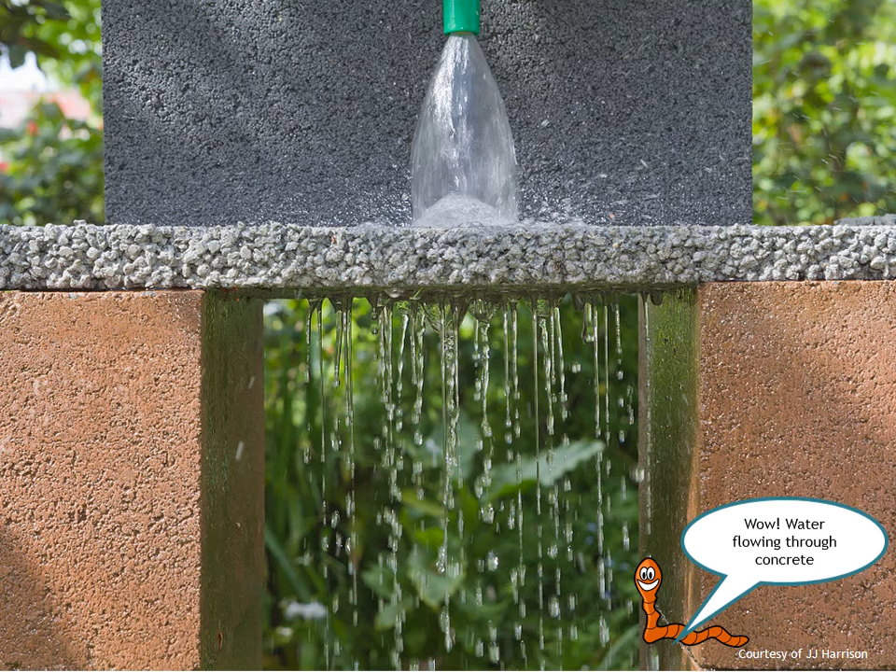When you are walking, bicycling, or driving, do you notice the surfaces you are traveling over? Hard materials like concrete, asphalt, or bricks are common. These are chosen for their strength and durability. But watch them in the rain. Water will puddle and pond because it cannot pass through and does not soak into the soil below. Permeable pavements, however, are different. These surfaces are engineered to let the water in.

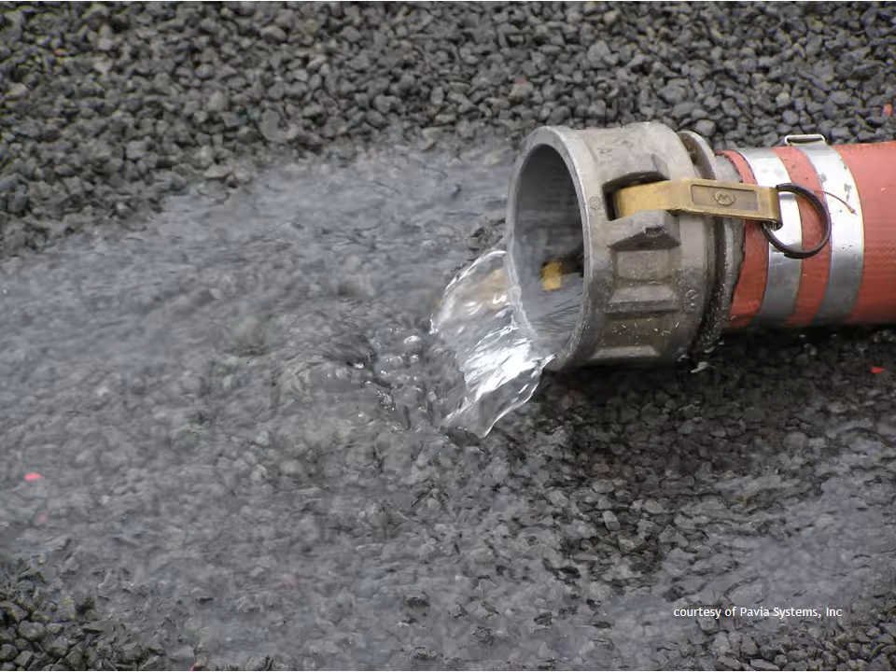Rainwater that puddles and ponds on our playgrounds, sidewalks, and roadways becomes stormwater, carrying dirt, oils, and all manner of pollution to the nearest water body through storm drains. If you are in the District of Columbia, the rain falling around you is headed to Rock Creek or the Anacostia or Potomac rivers. During heavy rainfall, streets may flood temporarily, but even those waters will eventually end up in the Chesapeake Bay. Permeable pavement can help protect the quality of our rivers and the bay.

By allowing large amounts of rainwater through paved surfaces, we help restore the natural water cycle and minimize the polluting effects of our city.

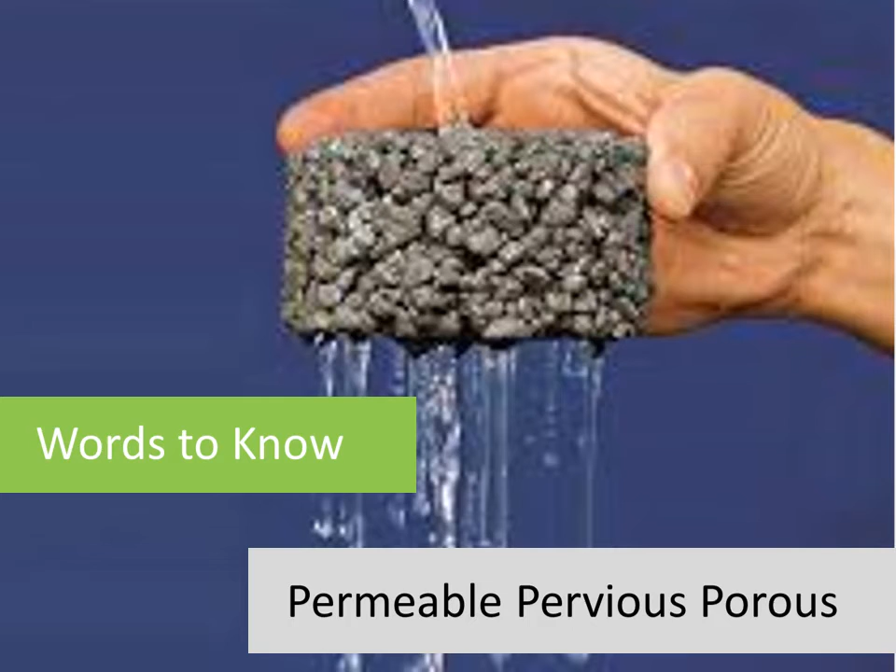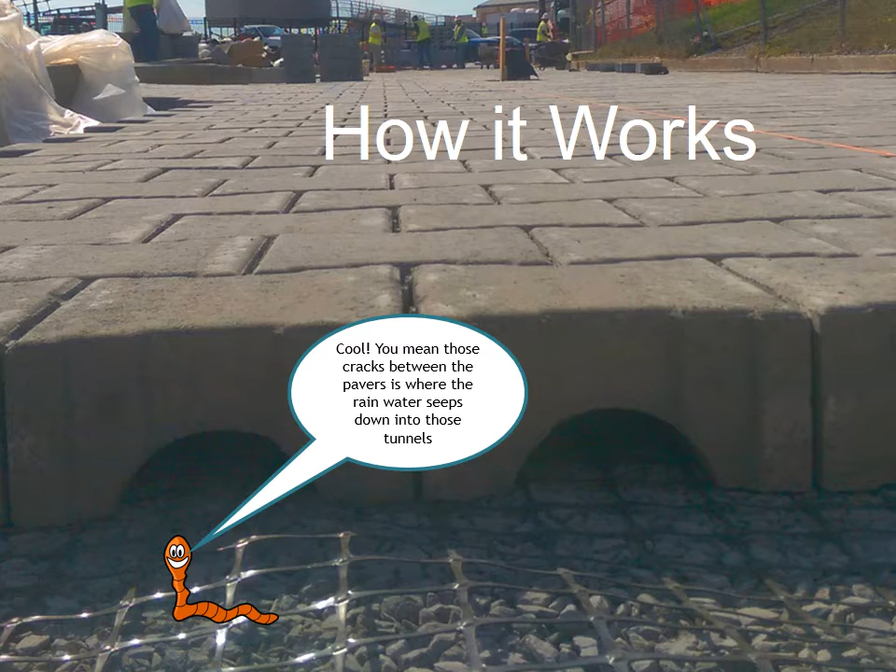Permeable pavement materials have unique and interesting properties, but their ability to absorb rain and remain strong relies on strategic layers of specially selected rocks or aggregates. These rock layers may be a few inches or several feet deep, and this depth will be decided based on an array of factors, from the amount of area draining to the pavement, the contour of land, and the type of allowable traffic.

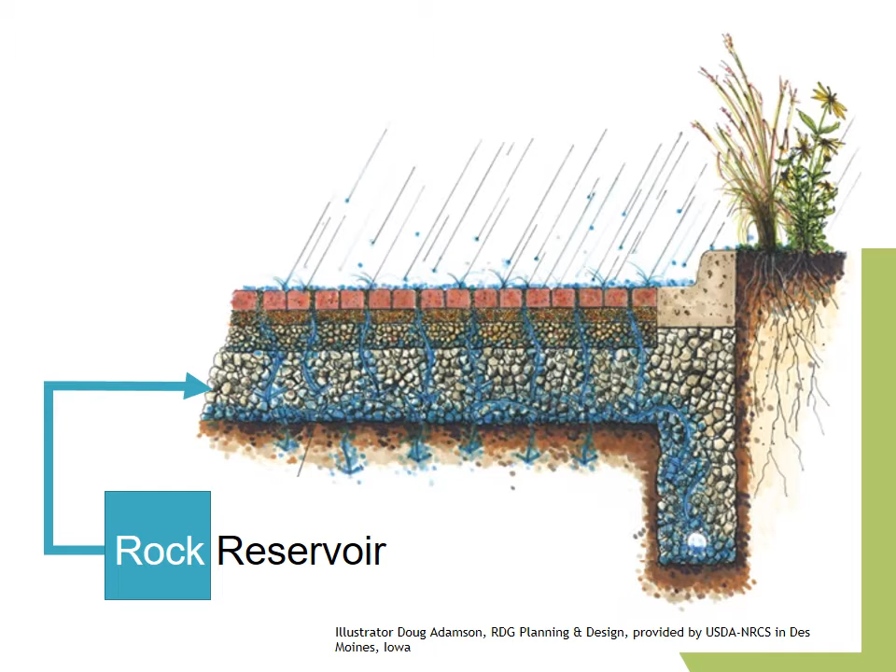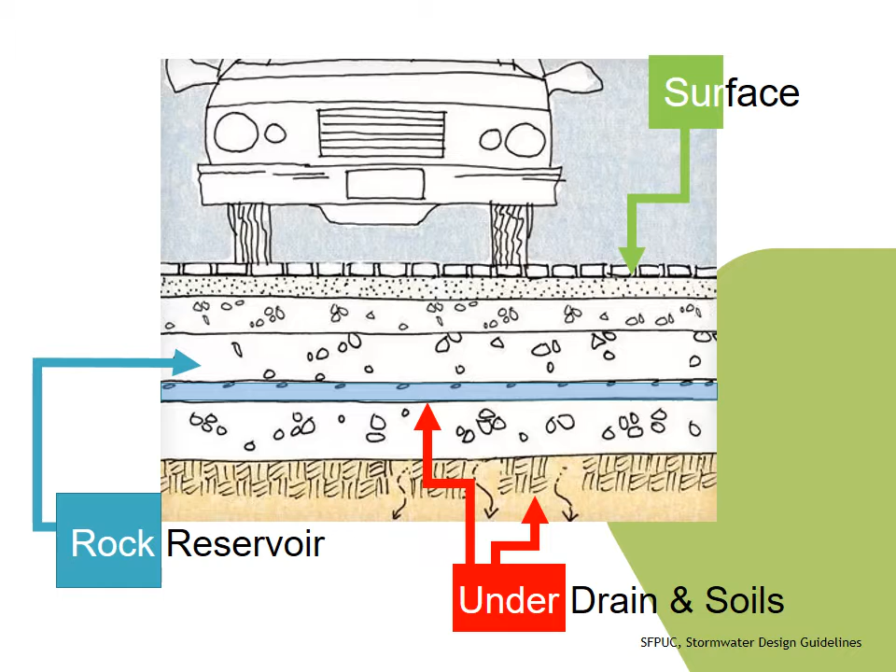Permeable pavements are systems with 3 main components: the surface to let the water through, the rock reservoir to store it, and a combination of underdrains and underlying soils to give the stored rainwater somewhere to go. In some parts of D.C., the soils below existing sidewalks and roads have the capacity to absorb rainwater. But in some parts of the city, the soils do not. If you are in an area of the city with clay soils, a permeable pavement system is certain to have an underdrain to slowly release the stored rainwater back to the storm drains long after the storm is over.

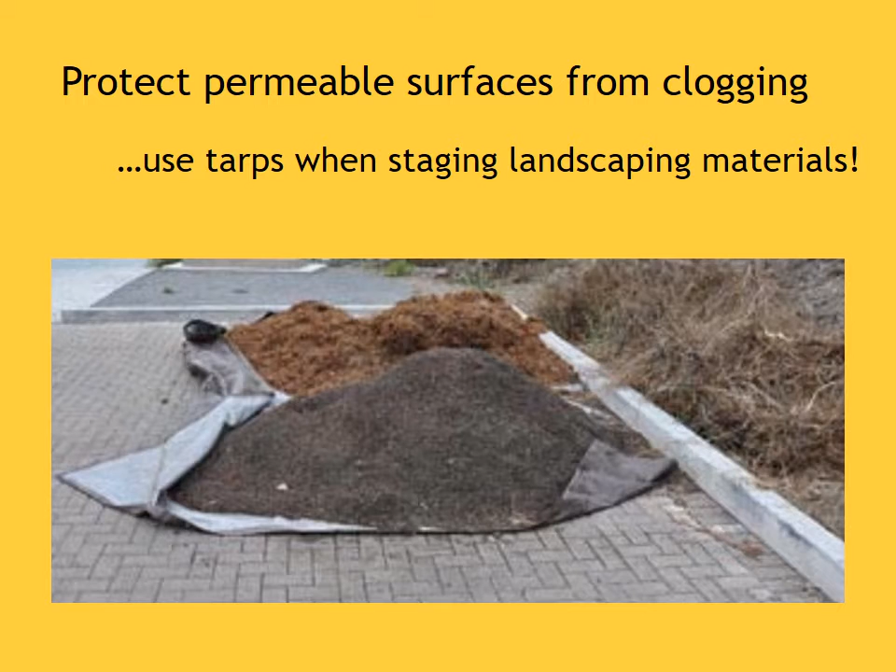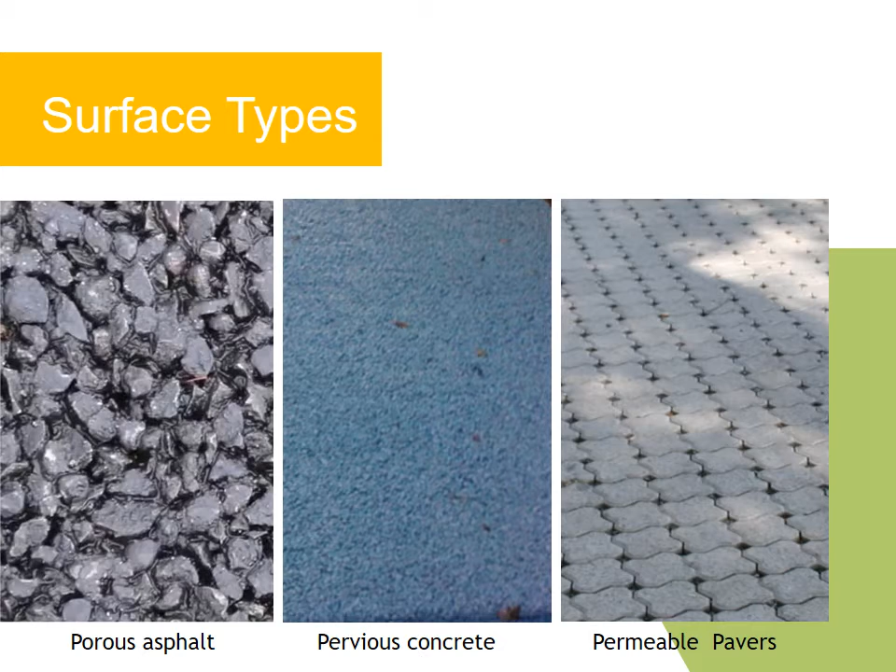Knowing the parts of a permeable pavement system and how they work will help you spot the maintenance challenges and remember the do's and don'ts when you are gardening nearby. There is an ever-growing market of innovative surface materials used for permeable pavement systems. The 3 most frequently used in green schoolyards are porous asphalt, pervious concrete, and a range of permeable pavers that can be pervious themselves or rely on the aggregate-filled joints between the pavers to create permeability.

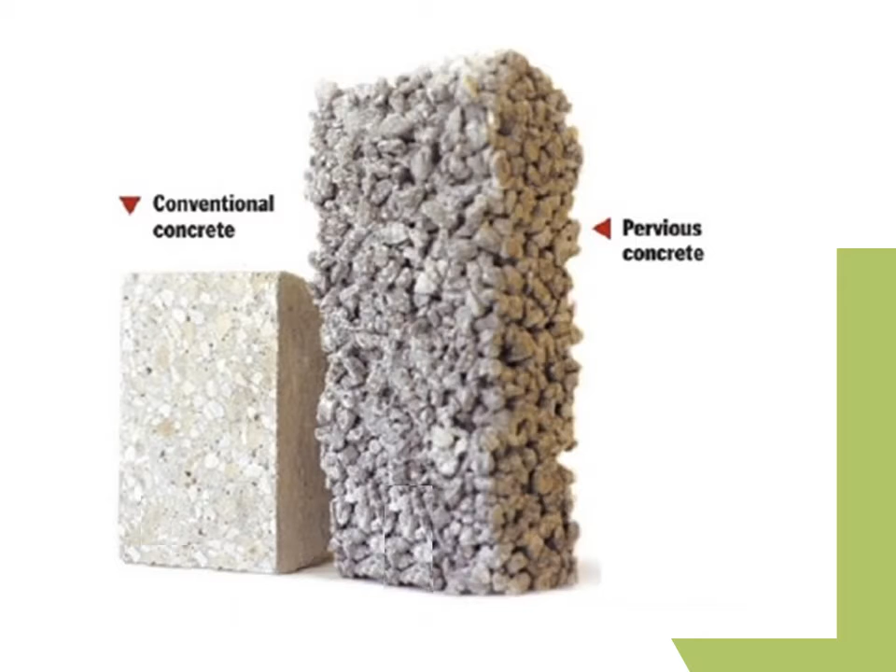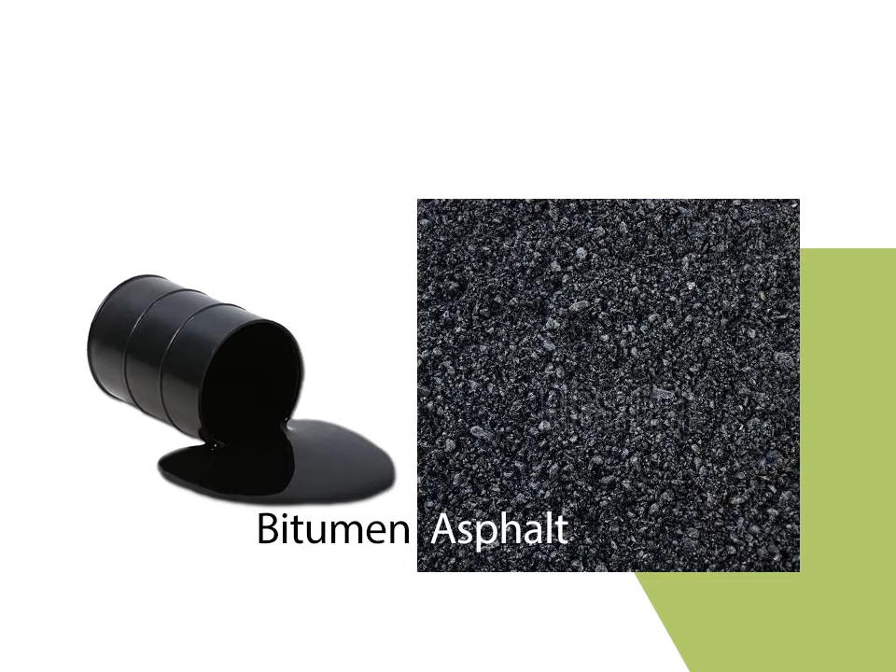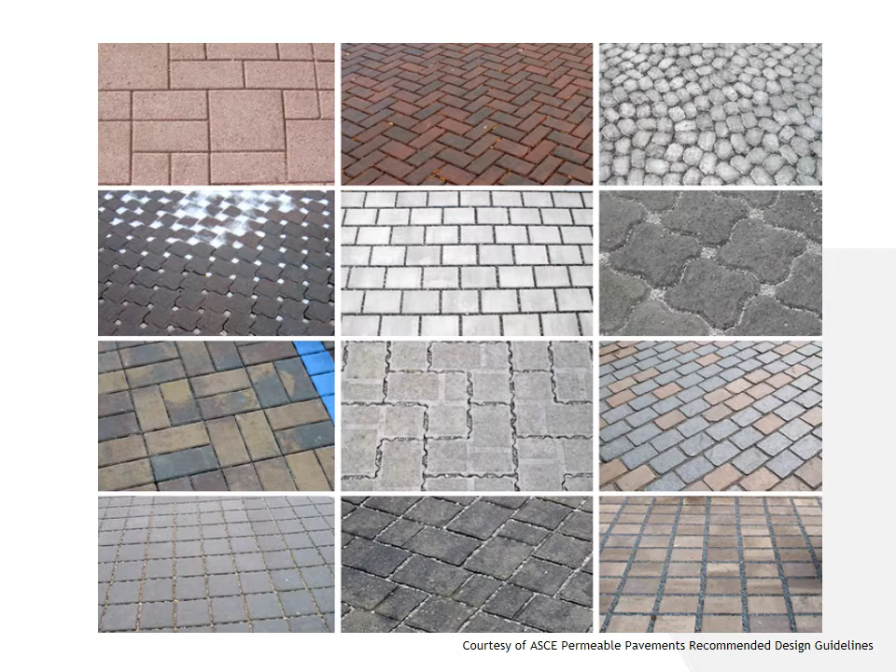Pervious concrete is made of the same ingredients found in conventional concrete. The difference is in the amount of the fine-grained sand left out, creating a popcorn-like matrix with space for the water. Similarly, porous asphalt is made of the same ingredients found in conventional asphalt. The difference is found in the type of binder used, also creating the popcorn matrix with void space for water. With interlocking concrete pavers, the paver itself is a traditional concrete and impervious. The system's permeability comes from the aggregate in the joints between the pavers.

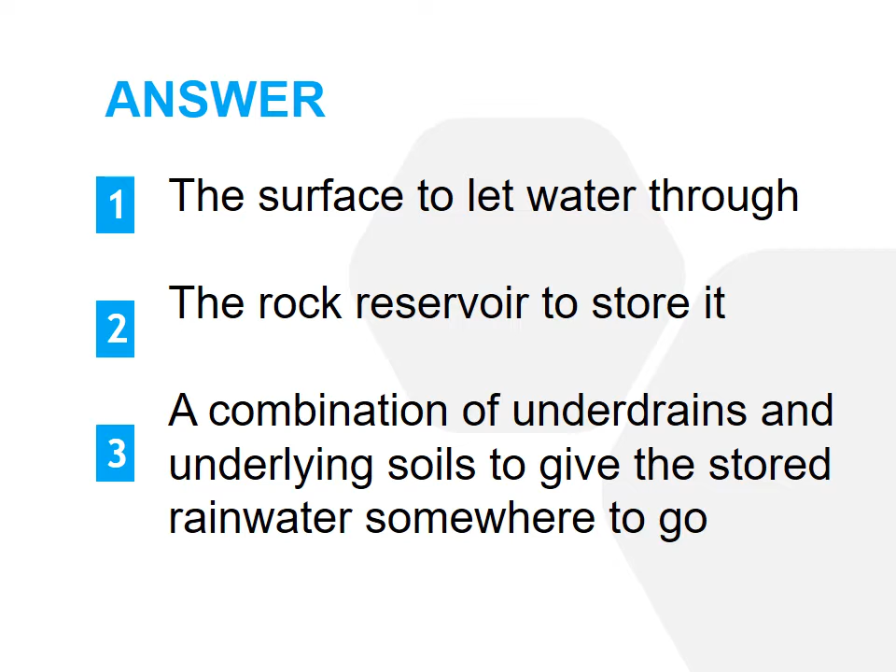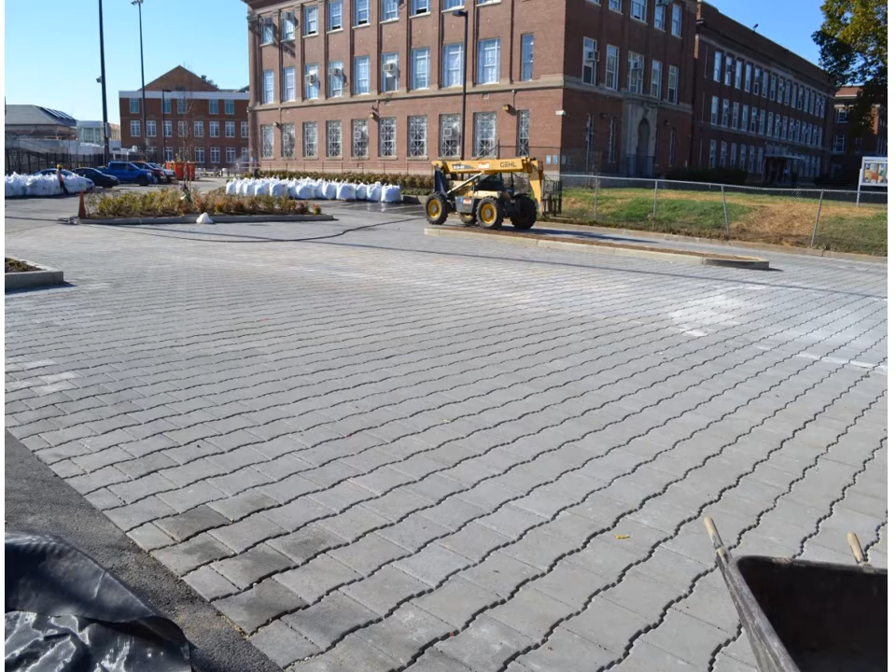Permeable pavements installed at RiverSmart schools may be more challenging to identify than the conservation landscapes or rain gardens, but they are an important part of the schoolyard greening effort. If your team is committed to RiverSmart's success, you will want to be able to recognize permeable pavements, troubleshoot their challenges, and know the do's and don'ts for working around them. Some permeable pavements are easily identified by their distinct patterns and the aggregate that fills the space between the blocks. However, many permeable pavements are challenging to distinguish from their conventional counterparts unless you can observe them during the rain.

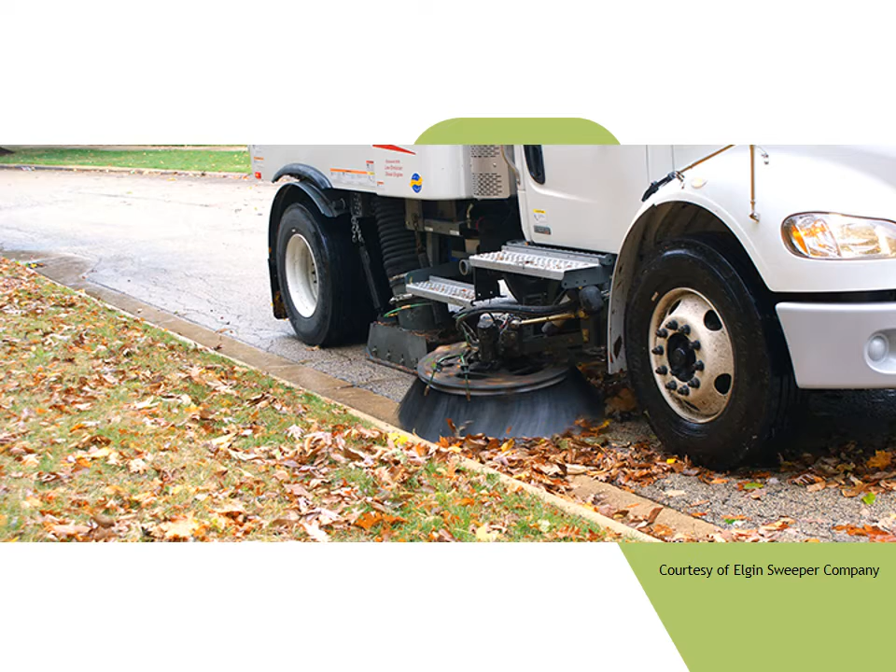If you are maintaining a landscaped area on school grounds during a dry period, it is a good idea to consult the school facility manager to have all permeable pavements on site located. When you know where they are, you can take precautions to protect them. Once located, how can you tell if these permeable pavements are working properly? If you are not a professional contractor in the maintenance industry, you will be limited by your tools, but there are important actions you can take. Visual inspections are the key.

Throughout the pavement's first 6 months, the rock reservoir storing rainwater below the surface may compact. This settling can cause surface cracks or dislodge pavers. If you are watching and see settling, say something. An installation is typically under warranty for the first year, and this can be repaired. Over the life of a permeable pavement system, observations after large rains are essential to spotting problems.

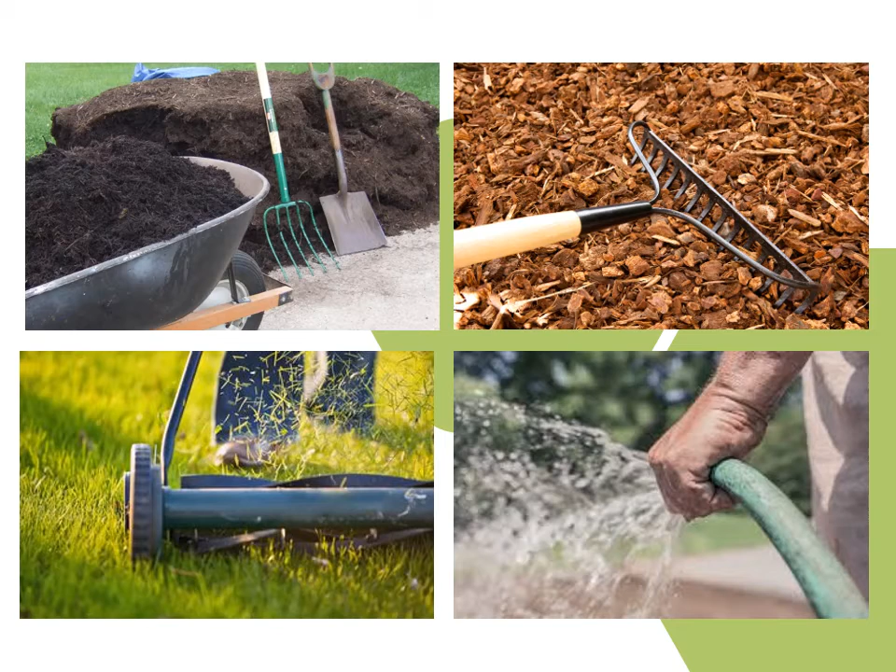Throughout the growing season, when mulching and mowing are common, rain can move these materials onto the pavement. If these are not regularly swept, they will clog the pavement pores, providing spots for weeds. If the growth exceeds what minor hand weeding can manage, action with a weed burner may be required. Left untreated, the buildup of sediments and weeds will lead to extensive clogging, and ponded water will become apparent after big rains. Alert the appropriate manager to ensure this maintenance is performed.

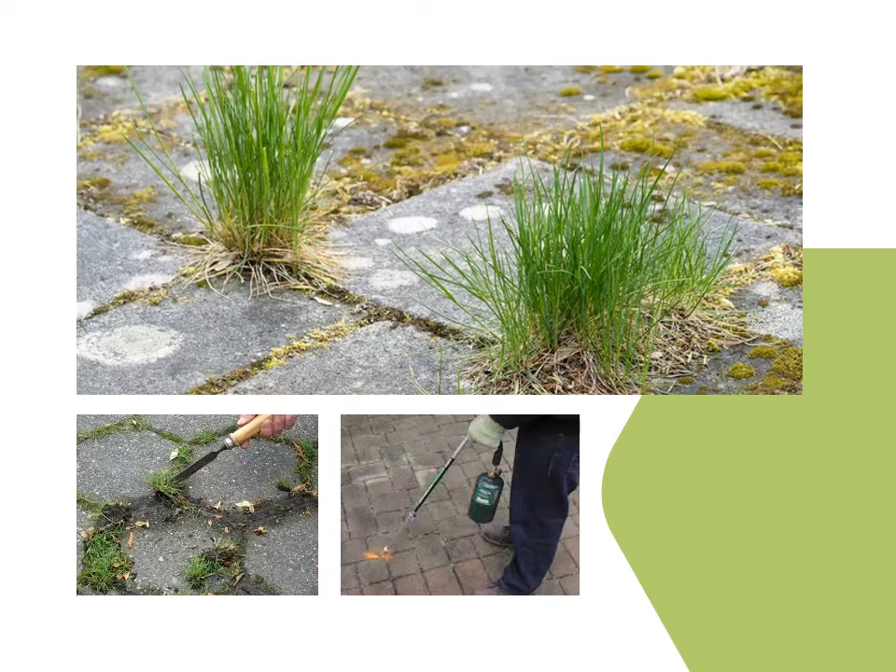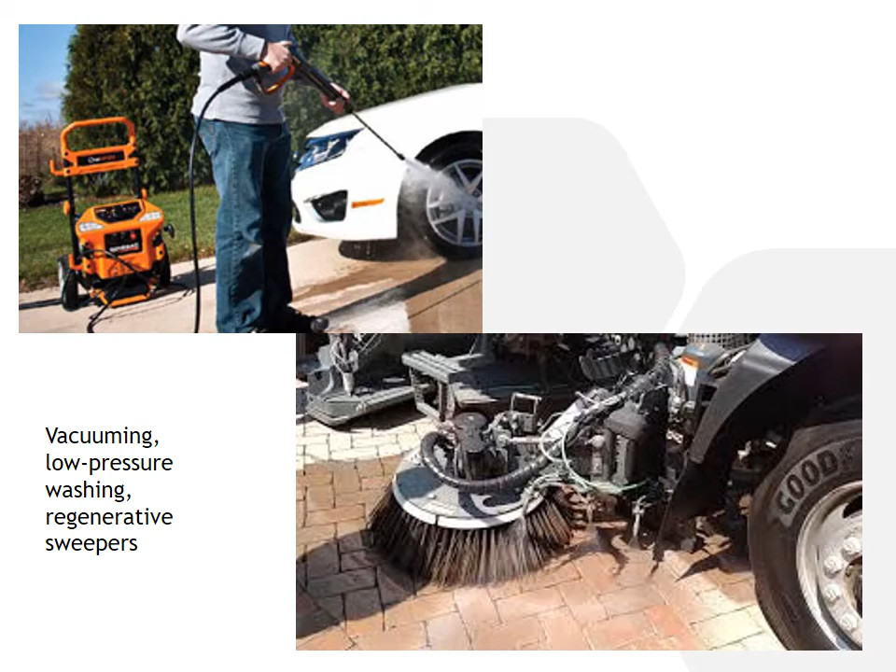Vacuuming, low-pressure washing, or regenerative sweepers can be used to restore the permeability of these pavements. Permeable pavements maintained with sweeping machines on an annual or semi-annual basis rarely clog. If pavement is installed in a high leaf litter area, monthly or even weekly machine sweeping could be required.

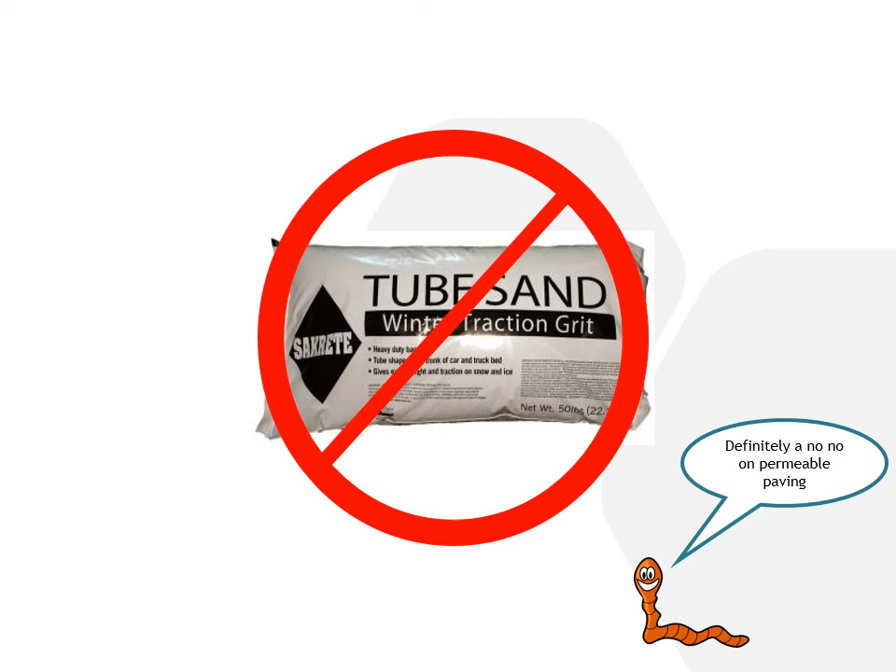You will need to watch periodically during the winter when de-icing and plowing are in use on pavements. Spreading grit or sand to create grip will clog these pavements. If you see sanding, say something to the school facility manager. Salting has a negative effect on water quality and is a significant problem for pervious concrete. Salts can cause the concrete surface to unravel. Avoid sands and salts around permeable pavements.

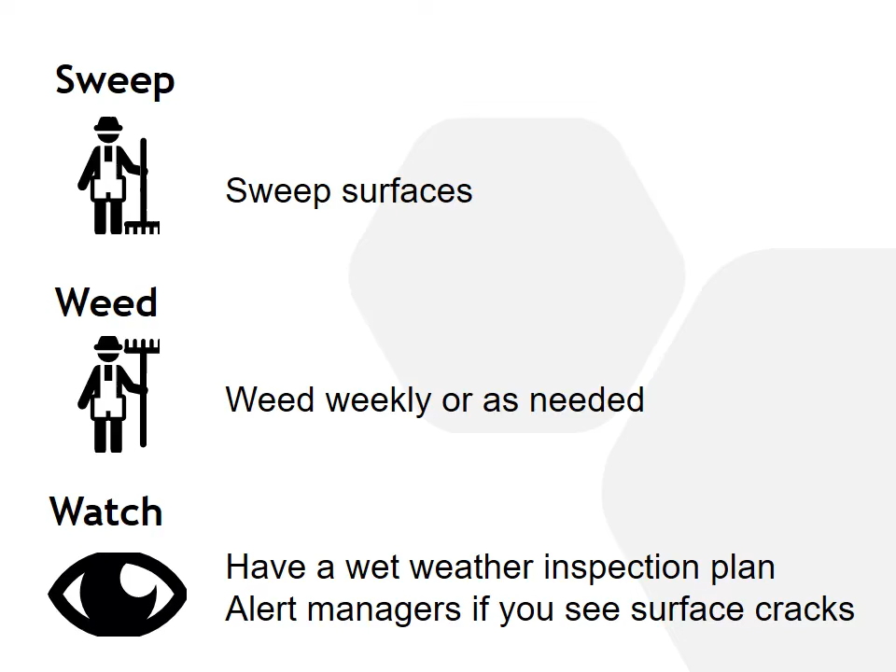Use environmentally safe de-icers. Remember, identify if your RiverSmart school site has permeable pavement. Have a wet weather inspection plan. Sweep surfaces and weed weekly, or as needed. Alert managers if you observe surface cracks or dislodged bricks. What you don't do is as important as what you do.

Avoid actions that can contribute sediments, encourage weeds, because sediments and weeds are the main causes for clogging. Avoid actions that might introduce chemicals. This adds pollution to the rock reservoir below. With minimal attention, following these simple precautions, the permeable pavement should provide years of stormwater service, protecting our streams and rivers.